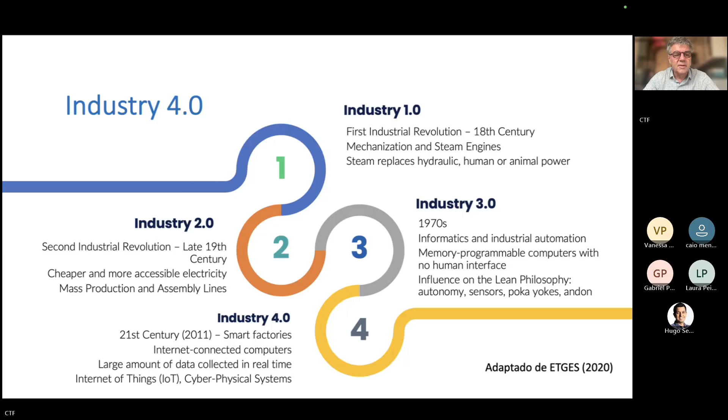I like this very simple definition of Industry 4.0: it combines digitalization and automation of production units or services—it's not only in manufacturing plants, it can be related to services too. A second component of Industry 4.0 is the creation of a digital value chain, which is when companies and production units become digitally integrated, creating many opportunities for improvement.

Some of the technologies you've seen in this course, like digital twins and automation in quality control, are examples of applications of some of the ideas of Industry 4.0 in construction.

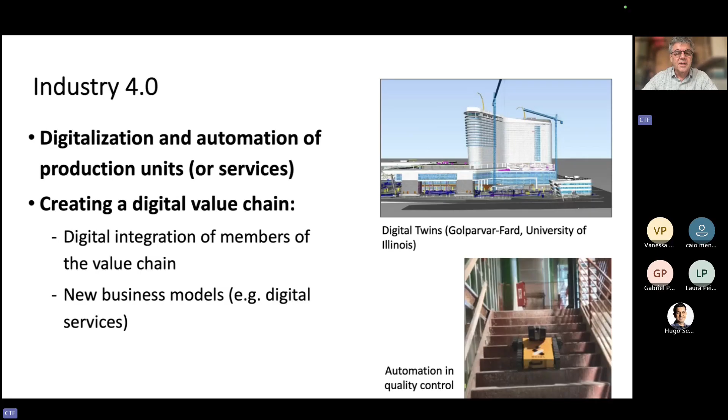One important thing is that when we introduce this new approach for digital systems, there is usually a change in management. For some years there has been a discussion: what is the new managerial philosophy for Industry 4.0? Is it lean production, which became very important since the 1980s, or is it something else?

What the literature says is that there is a very strong synergy between Industry 4.0 and lean production or lean management. By synergy, I mean lean management contributes to the introduction of Industry 4.0 because it brings a process vision, an approach for standardizing work, it improves layout and physical organization of production, it brings the idea of visual management and other concepts that really facilitate the introduction of Industry 4.0.

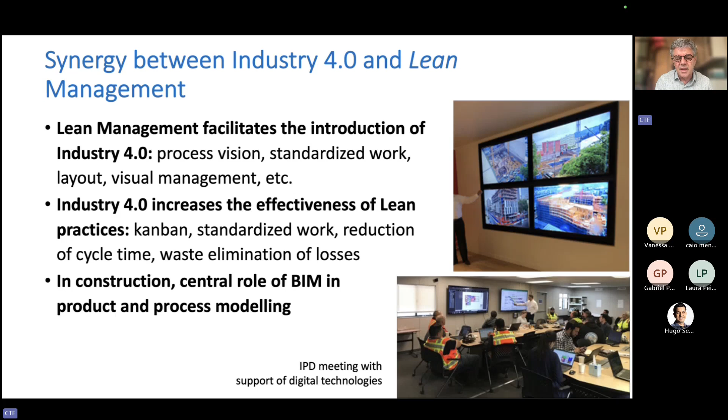I'd like to also point out the role of building information modeling. This has been very important for the introduction of Industry 4.0 in construction, because BIM has brought to construction the idea that digitalization must be focused on core elements of construction—it's very much about product modeling and also process modeling.

These are some examples that explain a little bit this synergy. An important change that people talk about in construction now is visual management, a very important concept in production. Visual management traditionally has been something with a low level of digitalization.

Traditional visual management is based on cards, physical devices, boards, colors, and so on. Nowadays people talk about digital visual management, which is a very important change. A few years ago there was a discussion about whether it's possible to make visual management fully digital.

Probably we still have some physical elements of visual management, traditional visual management devices, but there are several studies that provide evidence that digital systems in visual management can bring several benefits.

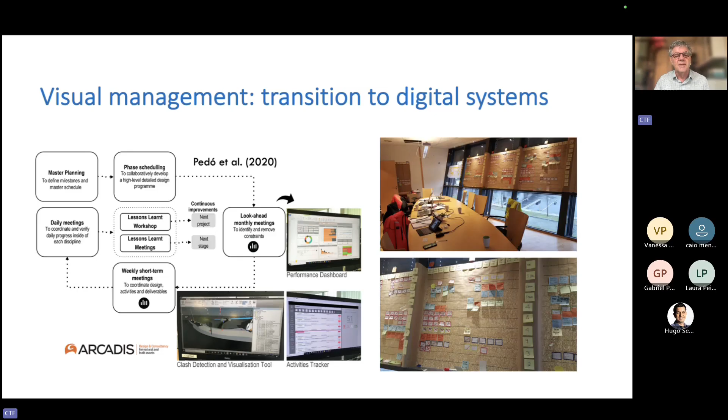Another example, this is not part of a research project. This is a site visit that I did a few years ago at a DPR construction site. DPR is a company from the United States, very advanced in Lean. It's a leader in the implementation of Lean construction.

I saw several things in this construction site, but one of the things that was very interesting was this very small robot, not very expensive. This is a robot for marking, for defining the position of drywall partitions, for instance. I thought it was a very useful device, a very useful robot, because it does a task that is very important: marking, defining the right position for construction components.

It also eliminates an activity that is difficult and demands skills. It's hard to do it because the position of the work is not very comfortable. So it's an excellent idea.

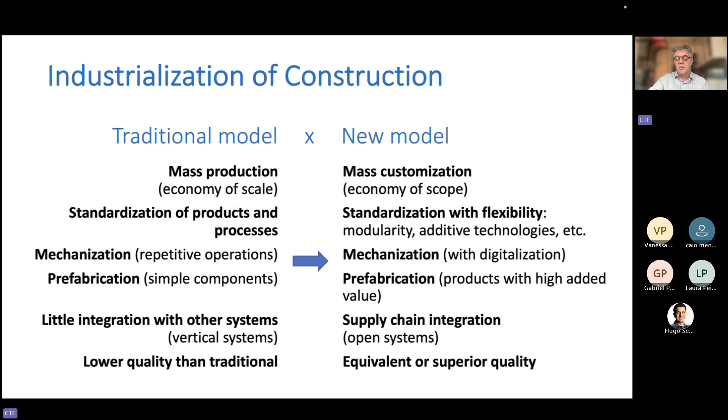So what is modular construction? The concept of modular construction involves several ideas, and sometimes it's difficult to define a strict limit of what is modular construction and what is just prefabricated construction.

A general definition of modular construction is a construction process in which a large share of activities are executed off-site in a controlled environment, in a plant, which can be highly advanced or maybe not so advanced, and has a high degree of mechanization.

Some people think modular construction is about delivering components that have 3 dimensions. That's not true. Typically, modular construction involves panels or volumetric modules. But you can have also some components that are not 2D or 3D components.

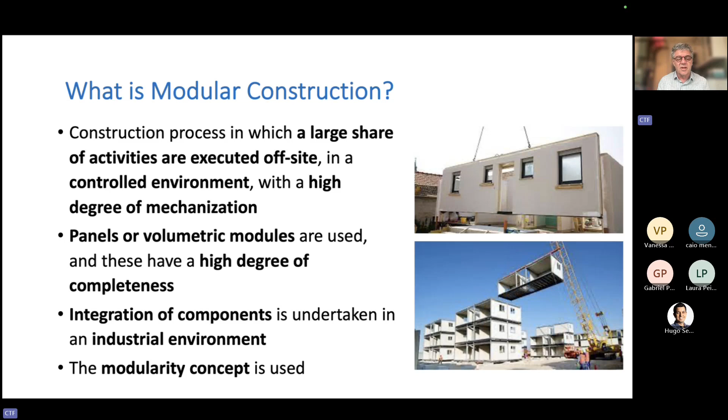So some limitations of modular construction, in many cases the ideas of modular construction that I presented in the previous slides are not fully implemented. For instance, many modular construction companies do not deliver a combination of highly repetitive standardized modules produced by semi-automated production lines.

Some people use this expression, that the plant of that company is a construction site with a roof. So many companies just use the idea of off-site production protected from inclement weather, but it doesn't actually have a high level of industrialization. Although there are companies that are very advanced in that respect.

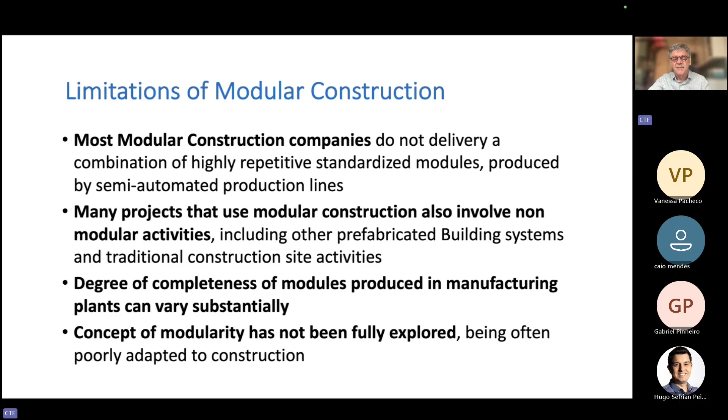Okay, so these are some examples. First, some companies from Brazil, Tec Verde, a company that was started in the state of Paraná. Now they moved to São Paulo. A company that I followed the evolution of because it was a very innovative company. They work with wood frame.

Another company from Paraná, which is very different, Espaço Smart. Espaço Smart is a company that has shops around the country and also in some other Latin American countries. And they deliver steel frame houses.

But Espaço Smart, they don't assemble volumetric modules in the manufacturing plant. They produce kits, and they have an extensive network of designers, construction companies that provide services for specific projects. So they deliver the kits, they train these companies, and they assemble the houses in the construction site.

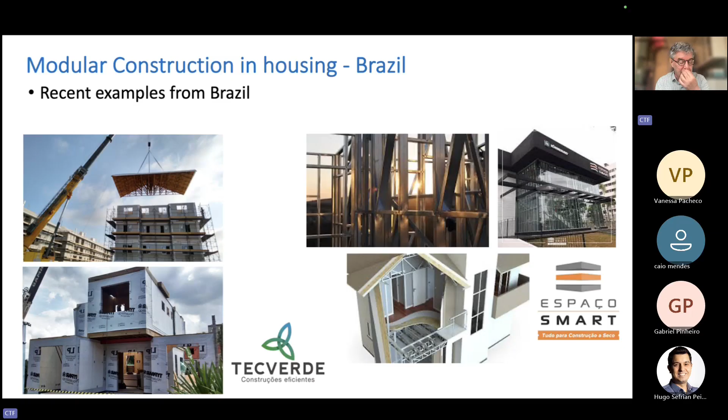This is a dilemma that many companies face. A company that delivers the whole project provides a full solution for the client. But if the company only delivers prefabricated components, who is going to do the rest of the project? Is it a traditional construction company? Is it necessary to have two contracts, one with a modular construction company and one for a traditional contractor? What the experience shows around the world is that companies that opt to sell modules, to sell components, become very vulnerable in the market, because typically clients want a complete solution. They don't want to buy modules and then find another way to deliver projects.

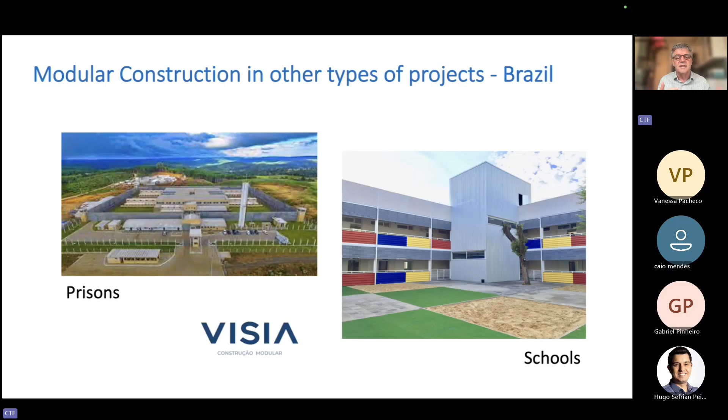So which are the most developed cases of implementation of modular construction? Sweden is one case. Not only Sweden, but Scandinavian countries are very good. There are many good experiences in Canada, in the United States, in the UK. The UK has a very large number of modular construction companies, but perhaps the most advanced one is Japan.

Japan has a very advanced modular construction sector. This segment started to grow in the 60s. There was some kind of support or coordination by the government. And now there are a number of companies that are able to deliver highly industrialized buildings, especially housing. In the housing segment, especially individual houses, this is a relatively large market in Japan. These companies develop technologies, they have labs, some of them have research institutes.

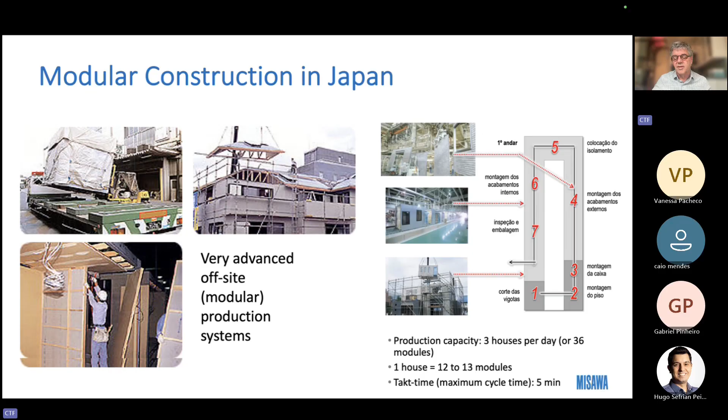These companies in the past were focused only on the Japanese market. Nowadays these companies are changing because the Japanese housing market is reducing a lot due to the decrease in demand for houses because of the age of the population and so on, which is something typical of developed countries.

So these companies, they are very good at applying the concept of mass customization, right? So I'd like to explain a little bit more about mass customization because it's a very interesting concept.

This mass customization idea started to be discussed in the 1970s, and it's very much related to competition, right? To companies that have a competitive strategy, right? Which means they want to compete with other companies by offering products that fulfill customer-specific requirements.

By having flexible processes and structure, the company has a degree of flexibility related to the way processes are organized, but also in the structure of the company, right? So they have staff that are able to do activities with flexibility, that might be related, for instance, to the manufacturing plant.

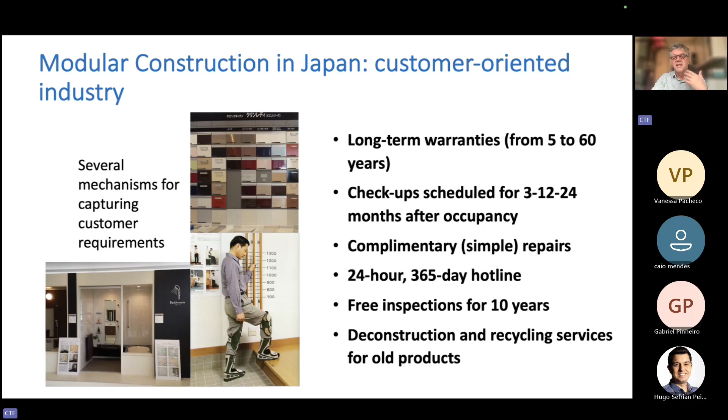And this limited customization is based on a deep knowledge about customer requirements. This contact with the customers that the Japanese companies have generates lots of knowledge about the customers. By doing that, for instance, by talking to the customer, seeing the customer visiting the showrooms, they're able to understand customer requirements, right?

And the idea is that this customer is willing to pay a premium price for this customization, right? This is something that happens in many markets. For instance, we've done lots of work in mass customization here in Brazil.

And something we notice even in housing for the, let's say, lower middle class, right? So if you deliver a standardized house, a standard house, to different people, the first thing people do before moving to the house is to change walls, change finishings, open a new window. They do lots of things because they want a house that fulfills the specific requirements.

So these Japanese companies and some other companies from other parts of the world, they found this as a very important competitive strategy.

And this is the studies we've done in housing, including social housing. We found out that providing a standard house, a standard product, results in poor value generation. Value generation is one of the most important principles in lean production, right? So one way of improving value generation is to consider the diversity of customer profiles.

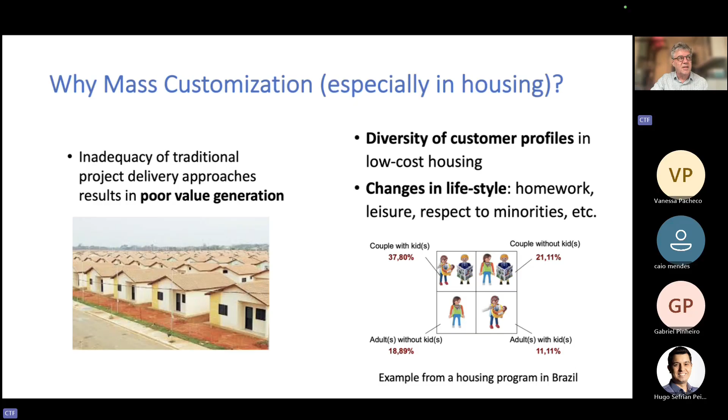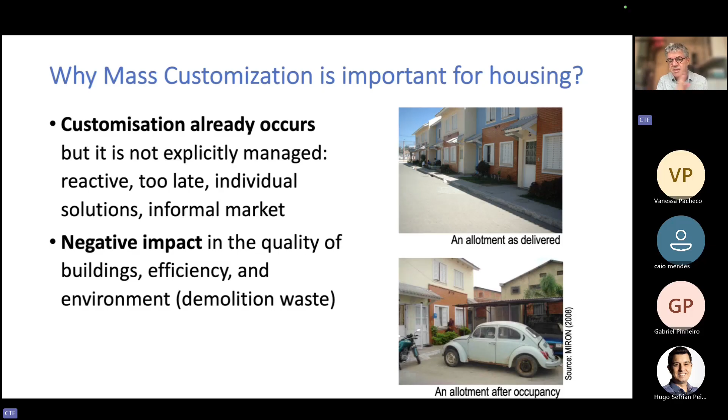And what happened is that customization occurs anyway. People change a lot their houses. So this is an allotment for people that have a very, very low income. We've done a post-occupancy evaluation after a few years, and the houses have been completely changed and extended.

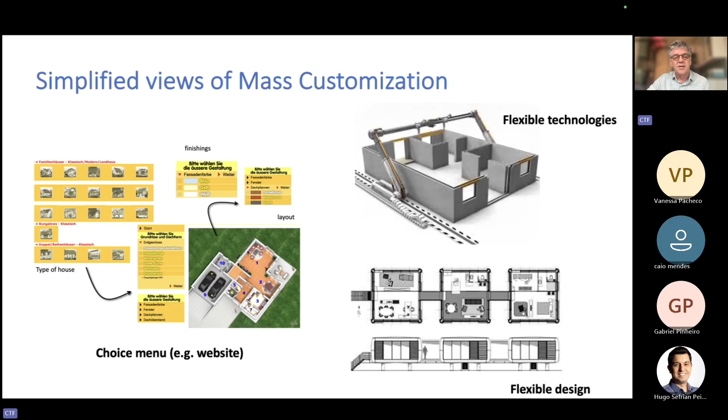One important thing is not to have a simplified view of mass customization, right? People think, well, I can have a printer of houses, I can do a flexible design, I can offer a choice menu for housing. That's too simplified. In fact, mass customization involves several fields of knowledge, right?

It involves marketing, because you need to understand the requirements of the customer. It involves design - you need to design products that are suitable for that population. And you need to change the way you manage your operations - I mean the production process, supply chain, logistics, and so on. And I find mass customization fascinating because of that.

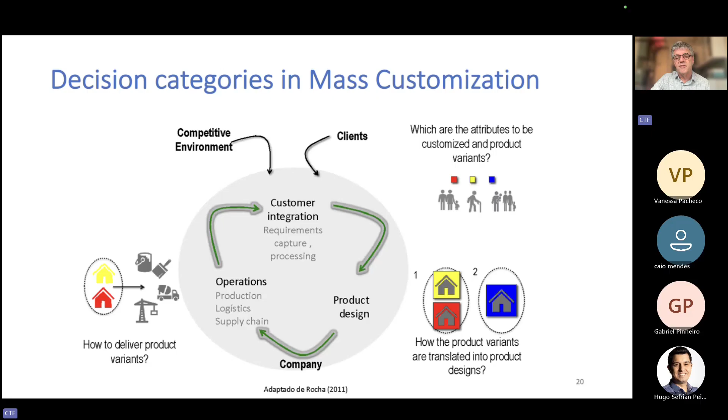So these are some concepts that are involved in mass customization related to those three fields. You can find several concepts that are related to lean construction, for instance, visual management, pull production, client requirements management, the idea of having collaborative design. This is also very well explored in production, right?

I'll show you some concepts. I'm not going to explain, of course, all of them. There are many. Just to give you an idea of which type of knowledge is involved in mass customization, and as a consequence in modular construction, right?

For instance, the concept of product modularity, right? So this is the most traditional type of modularity. I'm going to divide my product into modules. Each module has a different function, right? And each module can be produced by a different supplier or by a different production unit, right? And I have a standard interface between modules, so I can combine the modules in a different way, right? I can even have interchangeability between modules, right?

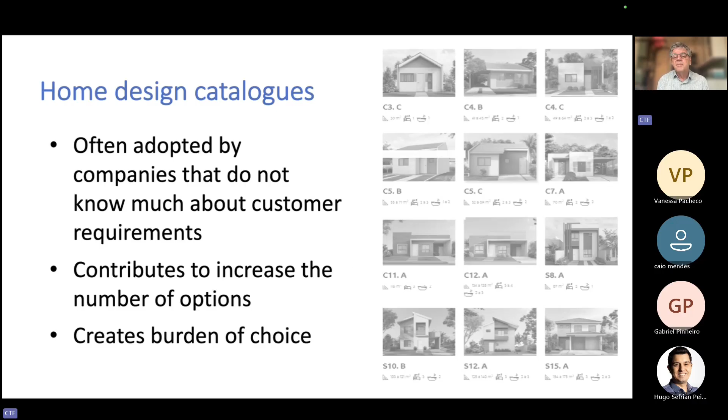This is an example of a study we did with some modular construction companies. Some of these companies have a very long catalog of designs of houses. For instance, we have 200 options, and as the company sells more, this catalog grows a lot, which creates a burden of choice. It's difficult for the customer to make a decision.

We did a study in one of these companies. These are 4 different designs of houses that were extracted from a catalog. And then by making some minor adjustments, we can have a platform, a product platform. We can have a set of standard modules that are going to be repeated in different types of housing design.

So I can store some of these components if I have some period of low demand. I can even sell the house in a different way. For instance, I can tell the customer, well, choose a platform. So this is a platform for a 1 floor, 3-bedroom house. And then you can add some additional modules depending on how much you want to spend, which kind of things you want to have in your house, how many cars you have, and so on.

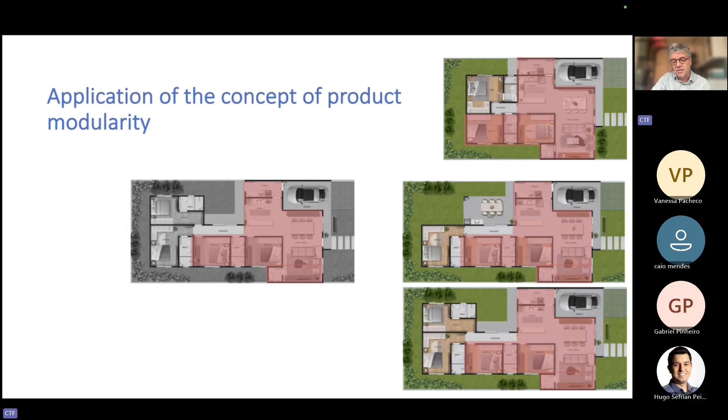So this is a very powerful concept, product modularity, which is not fully explored by most modular construction companies.

In some projects, you cannot have product modularity. Let's say I'm going to build an industrial building, and there's no complete repetition between parts of the building. But I can still use the concept of process modularity. So I divide my building into small batches. This is a Medabil project, Medabil is a steel fabricator. In each batch, you have a similar set of tasks, and so you have repetition in the process, although you don't have full repetition in the product.

This is another project we did. It's a parking building in Porto Alegre Airport. So we divided that building into batches, vertical batches of 4 floors. And then we created repetition. We could use the idea of takt production. So this is something that has been adopted by many modular construction companies.

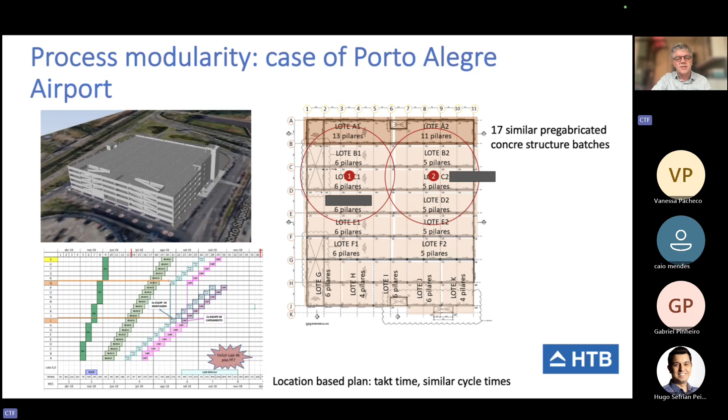So here you can see it's much more about operations. The product modularity is about design, here we're talking about operations. And there is a third type of modularity, which is supply chain modularity, which is when the supplier is interchangeable.

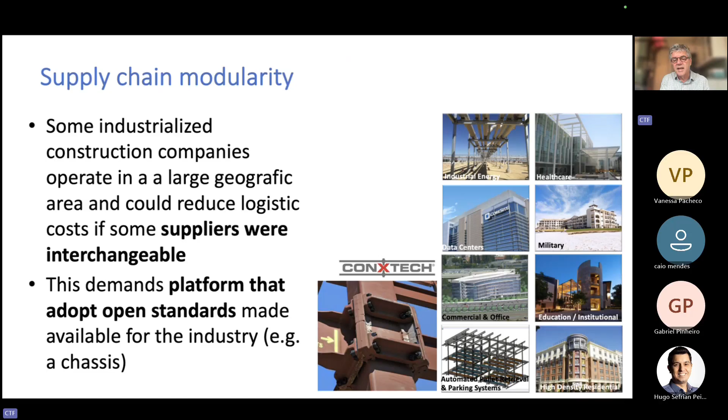When you want to have open industrialization, we want to involve different supply chain members in the production of industrialized building. This is a company, ConXtech, that adopts this idea of supply chain modularity. It's very well explained in the paper written by my colleague Daniela Viana. She used to be my PhD student.

And then by using this idea of supply chain modularity, we can start implementing modular construction gradually. So this is one way of implementing modular construction. The Japanese companies, the Swedish companies that are described in Helena Lidelöw's paper, they typically come from another sector, from the car industry, from the timber industry, from chemical industries. So these are not construction companies that become modular, but there's another way of implementing modular construction.

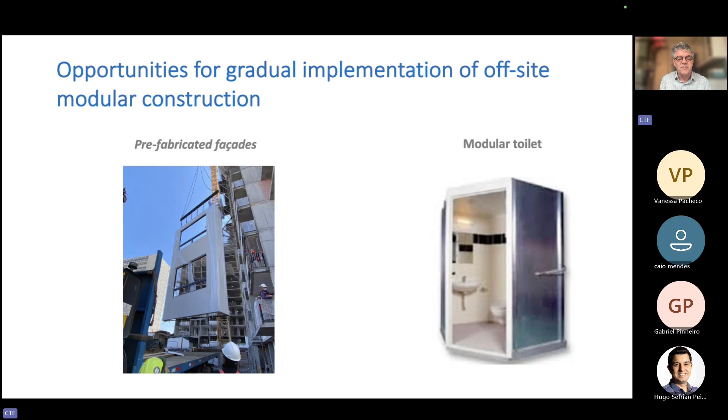For instance, real estate companies. They might start combining modules produced by different companies, modules for facades, modules for bathrooms, kits, electrical wiring kits, plumbing kits. So some companies from the real estate market are trying to implement that.

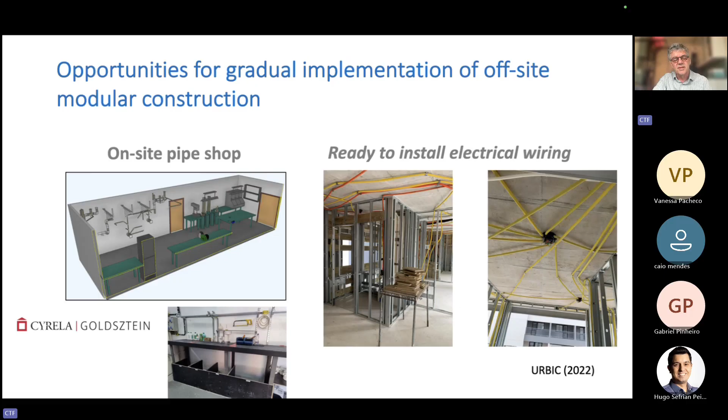Again, in this type of implementation, it's very, very important to use some lean production ideas. Pull production is very important. Prototyping. There are many different practices related to lean production that make this type of implementation feasible.

I'm not going to talk a lot about that, but there are also so many customer integration practices that can be used. These are some studies that we have developed in Brazil on how to expose the different housing options to customers, how to assess the willingness to pay.

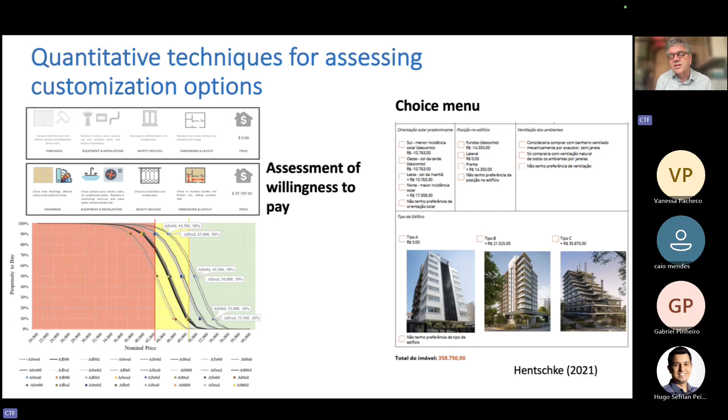This is really important. The customer wants to have customization, but is the customer willing to pay an additional price for that? There are techniques that help you assess that. How to devise a choice menu that is useful, a choice menu that will not create a false expectation in the customer. So we've done a study on that as well.

And these are studies that we've done in manufacturing plants and construction sites on the implementation of lean production to support modular construction.

They're using ideas based on the lean production philosophy: standardized work for reducing cycle time, kanban systems, visual management. It's a company that emphasizes continuous improvement a lot. They have a wonderful transformation process in the implementation of lean, but of course they're far away from the Japanese.

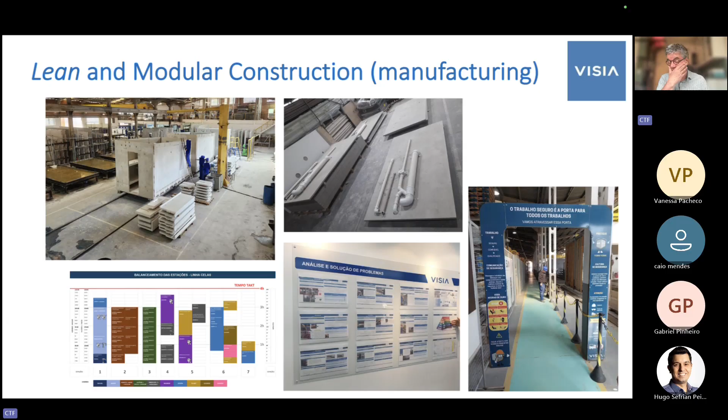Recently, the manufacturing plant celebrated the fact that they can produce 3 modules a day. If you remember the numbers from Japanese companies, they produce 3 houses a day, that's around 36 to 40 modules a day, so much higher throughput. Of course, they are bigger plants, but they have a cycle time of 3 to 5 minutes, a takt time of 5 minutes, which is something remarkable.

They are also using lean ideas for site installation, which includes the assembly of modular components, but also the production of the non-modular part of the project. So you can see line of balance, control of takt time, visualization techniques using BIM, the last planner system, visual management, and so on.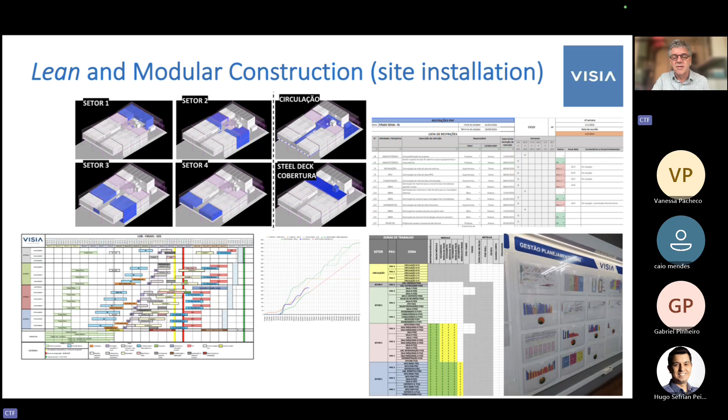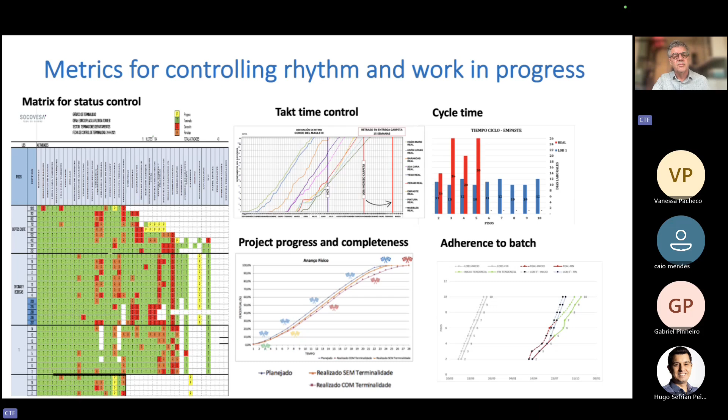In these implementations, we need different types of metrics for controlling different things. We need to control work in progress, the rhythm of different processes, cycle time, things like that. So we've been working a lot in our group on how to measure performance in those production systems.

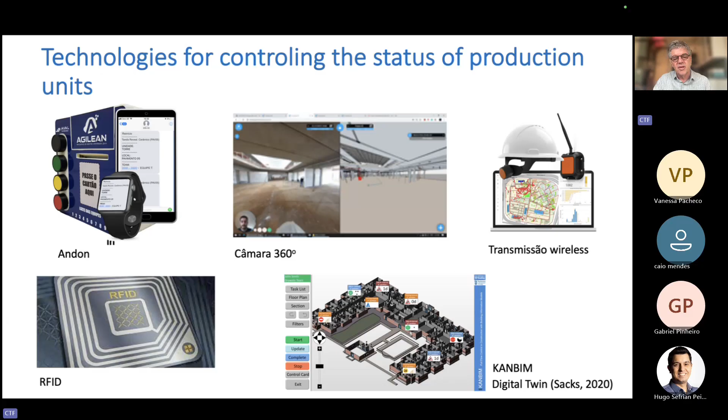And of course, digital technologies, some from Industry 4.0, are really important because they can provide real-time data. We can create databases, analyze that data, and extract knowledge from it. So this is a very important way forward.

Just to finalize, I'd like to emphasize something really important for keeping the effort of making construction more industrialized, which is sustainability. Of course, industrialized construction contributes to environmental sustainability, especially by the reduction of material waste, reduction in the consumption of energy, using a wide range of materials that have a much smaller environmental impact.

It also contributes to social sustainability by improving working conditions, by eliminating risks of certain accidents, and by considering diversity of users and diversity of requirements. And finally, modular construction can make environmental sustainability and social sustainability feasible because of economic sustainability.

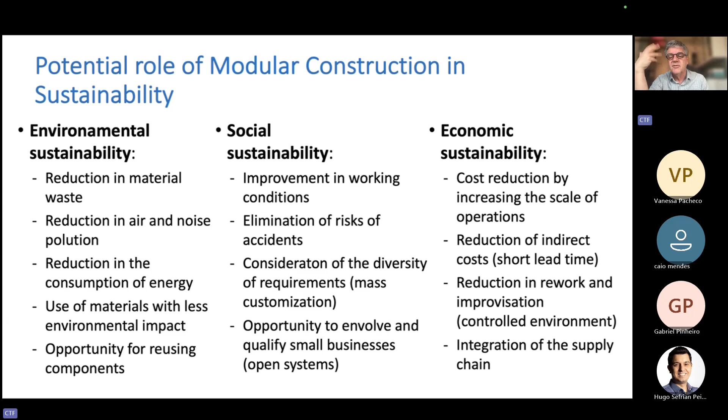So we need to achieve cost reductions. We need to reduce indirect costs. We need to reduce rework and improvisation, which will make construction more competitive.

So, my final slide now. There are many opportunities for combining this industrialization approach that I presented today, which is a combination of modular construction and mass customization, with digital technologies and with lean management. So we need studies that combine those three topics, or at least two of those three topics.

That would be an advance. We should avoid studies that are just focused on lean, or modular construction, or digital technology alone. We need to integrate this type of research effort.

We also need to adapt some of these ideas that have been developed for manufacturing into the construction industry. Concepts like pull production, takt time, work in progress control, and so on need to be adapted to the construction industry. We cannot just copy that from manufacturing.

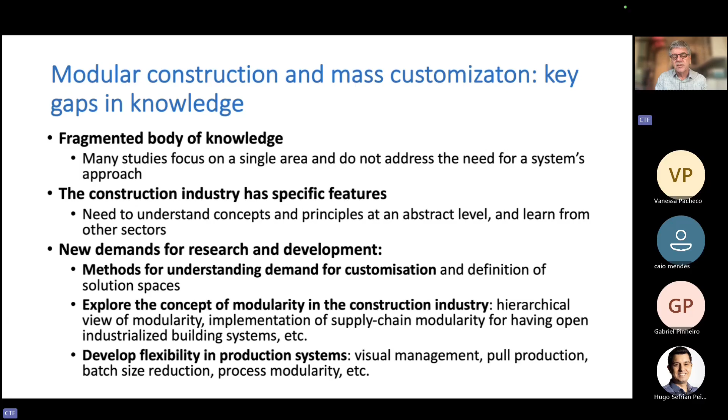One example is the big flood of 2024. We had suddenly a very large demand for modular construction, but the companies had to adapt quickly to fulfill a very specific demand that came out. Unfortunately, it was not very easy to make those modular construction projects feasible. So there were some benefits, but we expected to get much more from modular construction after that extreme climate event.